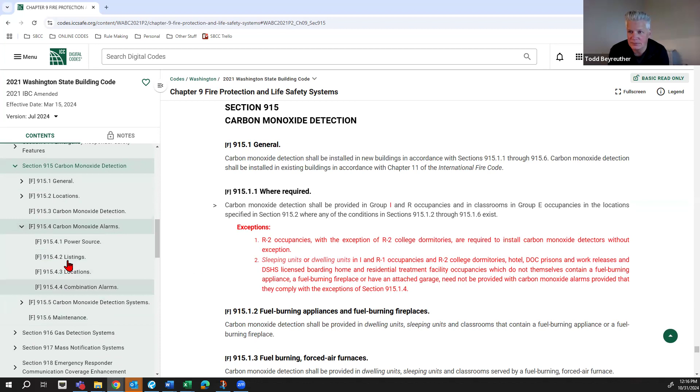Yeah, because Ken, the WAC reference, you said 50 or less, right? So that, yeah, would it be, says, yeah, E occupancies with an occupant load of 50 or less. So it'd be 915.2.3, which... Sorry, guys, yeah, so there you go. That exception that is showing. You move it around, it messes it all up. Sorry. 915.2.3 to compare to this one.

So the first thing is if I have an E occupancy of 50 or more, then alarm notification shall be provided at an on-site location. And then if I have an E occupancy having, an occupant load of more than 50, an audible and visible alarm shall be provided in an on-site location staffed by school personnel.

Isn't it saying the same thing twice? No, well, they're slightly different. One is 50 or more, and the other one is more than 50. So one you trigger at 50, the second one you trigger at 51. I mean, I see what you're saying. So okay. I mean, you can, if you're going to trigger everything at 50, you can, as Michael pointed out, just combine the two sentences now.

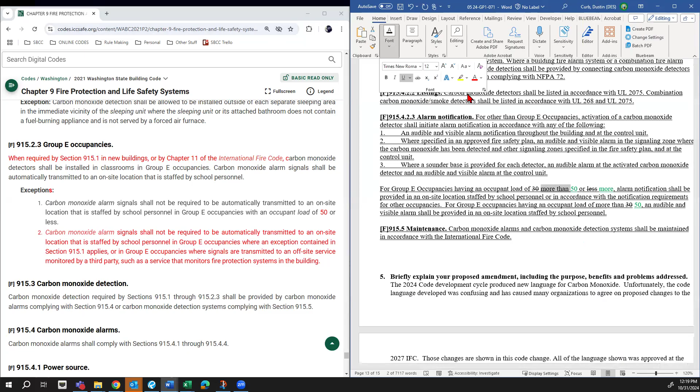Yeah, so if it's 50 or less, they're not supposed to do it per state law. So then 51, so it should be occupant load of 51 or more, right? You can say more than 50 to align it with the second thing. All right. So yeah, Dustin, if you can make that change. And again, John, do you have the history of why we went below national code? No, I don't know that history. Okay.

And then to Michael's point, it shouldn't just be one sentence. Instead of being redundant with the second sentence for group E occupants having an occupant load, just combine it all with an and. So we need to combine in there. I don't know, I think that's what I'm hearing, right, John and Michael? You're saying it should just be an and in there somewhere. Yeah, somehow to construct it, maybe it becomes two separate bullet points or something. But yeah, there you go. Don't need the trigger twice.

Does that align with your intent, Ken? Yeah, I was just trying to figure out where to stick the state amendment with the 50 in the right location, and that looks like that's the right spot.

Yeah, the two sentences seem somewhat redundant, though. Yeah, I think that's what we're trying to clean up here, Carson.

So that's where your cursor is now, Dustin, right? I know you're doing this on the fly and you're doing great, but you'll axe out everything up to past 50 there. That's a bullet point.

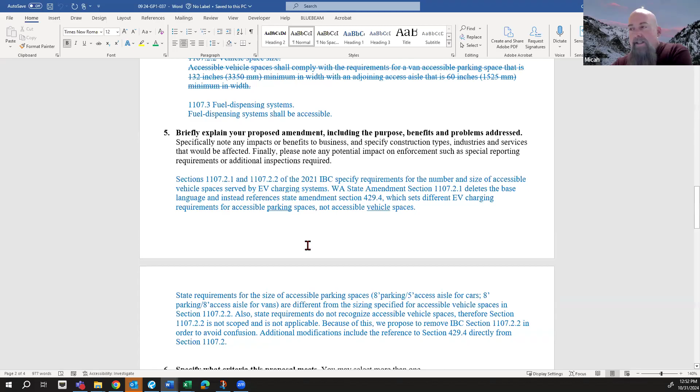So this cleans it up. This sends the EV infrastructure for accessible vehicle spaces back to 429.4 where it's appropriate, and keeps the other electric vehicle charging station information in 1107.2. So it's really just a cleanup of what we have in the state code, because we have modifications in 429 for EV and accessible EV spaces. Just some cleanup here. Hopefully you all support it, and if you need more information, let us know. I shouldn't say hopefully, I'm anticipating you all support this.

Go ahead, Tim. Yeah, I was just going to add on to what Micah said, because I am in support of this. But it does appear like some of the rewording caused us to have to stipulate that we comply with what the state RCW is, which we've meticulously gone over to make sure is all in section 429. I don't want to do that again and also put it in chapter 11. So that makes a lot of sense to me that we just reference it, and there's at least a pointer in chapter 11 if somebody went there first. But at the same time, we don't have to regurgitate everything we have there.

So in short, does this really clean up the discussion we had a month or two ago when we were going back and forth in circles between chapter 11 and 4? But that's the intent here, right? The way I read it. Yeah, okay, yeah.

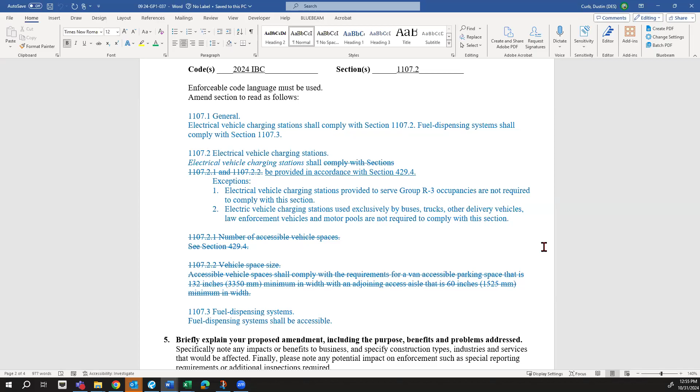Okay, if not, then all those in favor signify by saying aye. Aye, aye, aye, aye. And any opposed? Okay, and this is 037, has been recommended for approval by the full council. Thank you.

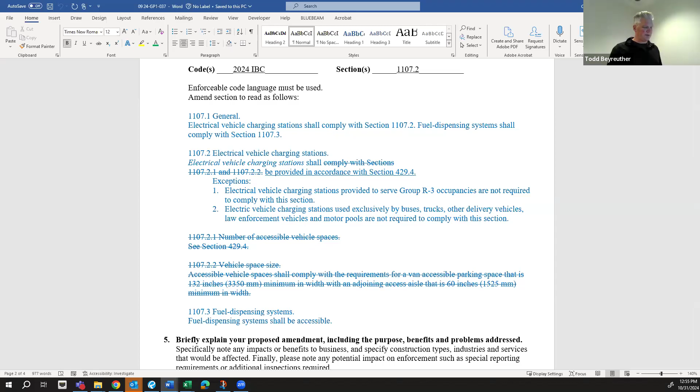Okay, agenda item 10 is another WABO petition, 061. Do we have a volunteer? Jennifer still on? Sorry, who, Dustin? Jennifer Gilliland, or did I bring up the wrong one? No, we have her as the designated contact. Yeah, 11:06, this is correct.

So this one also has Micah and Angela and John's names on it. Go ahead, Micah.

Thanks. I think Jennifer may have dropped off for another meeting or lunch or something. We're pretty stacked today, so would you prefer to wait or? Nah, we can handle this one.

I think this one's going to be another clarification and simplification of what's going on. If you read the reason statement, it clarifies the number of required accessible parking spaces for residents and how those are to be calculated. Hopefully it's pretty straightforward. I know that Jennifer and Rich put this together, and for folks that aren't aware, Jennifer and Rich Williams are both on the A117.

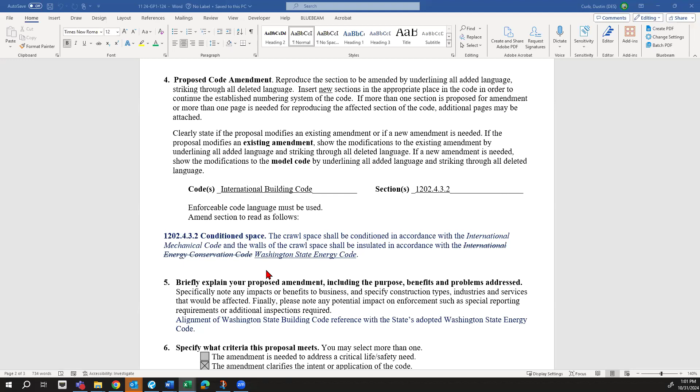Let me see. I think this - apologies, this one fell off my radar. I think it was just moving it into conformance with the Washington State Code. So it's like taking out the International Energy Conservation Code and replacing it with the Washington State Energy Code, just for clarity.

Yeah, it does seem pretty straightforward. Do others remember this conversation? I think we were talking about this at our existing amendments report, or the significant changes, and so this came up to clarify which energy code people should be looking at in this section. Did we ever determine how many times this occurs in the code? I don't think we necessarily did a full accounting on that, no.

And go ahead, John. Sorry, I think you're raising the question I kind of have, are we going to do this throughout the whole code? I think you can handle this much more simply with something in chapter 1 that says wherever you're talking about the IECC, you mean the Washington State Energy Code. Otherwise you're going to have to go through all the codes and find every place this happens and make that change. And it's a maintenance issue later too. Is it, my question, John, on the technical side, if there's a determination by the council that they wanted to do this, is it just a blanket editorial change across the entire code? Or is there the fundamental discussion you just raised there?

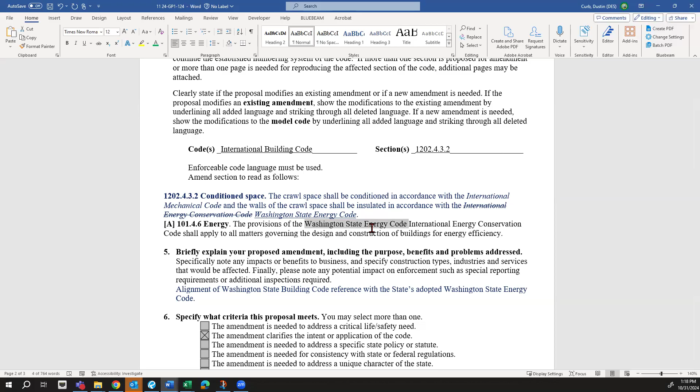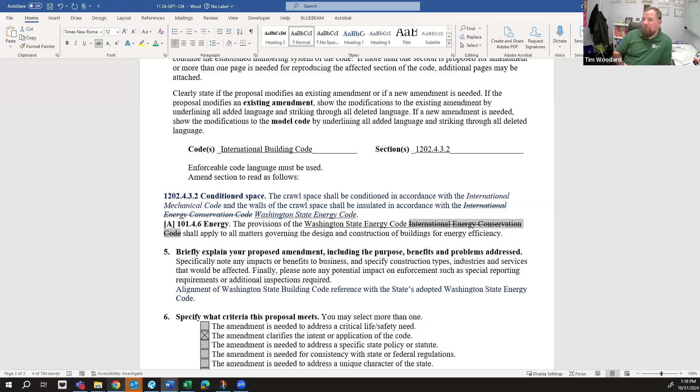51-50-007. Yeah, and that does show up in the preface to everything. Yeah, as the scope and administration of this code. So it's kind of like the user notes to what John was referencing. And it's not the user notes because they got those separate, but it would be at the very preface of the entire code book.

I'm not 100% sure that's the best spot, but that's the spot I was thinking of. It'd be a one-size-fits-all that we can reference all of the model codes and what we refer to them as throughout the building code. So not just the energy code, but also the Washington State Fire Code and the Washington Uniform Plumbing Code, all of the reference codes.

I agree, I think the WAC 51-50-007 is the best place for it. And then of course correlation, each WAC would have to have that same language. So that's why I suggested as a placeholder we could use 101.4.6, but with the goal of correlation essentially being to adjust the WAC 51-50-007 and its counterparts.

Sorry Mike, I didn't see your hand. You're okay. I guess I'll throw this out there as a more broad discussion, and I know WABO has discussed this before. Is there an appetite that we need to bring up at the SBCC to modify RCW 19.27.031 to make an exhaustive list of what the state adopts?

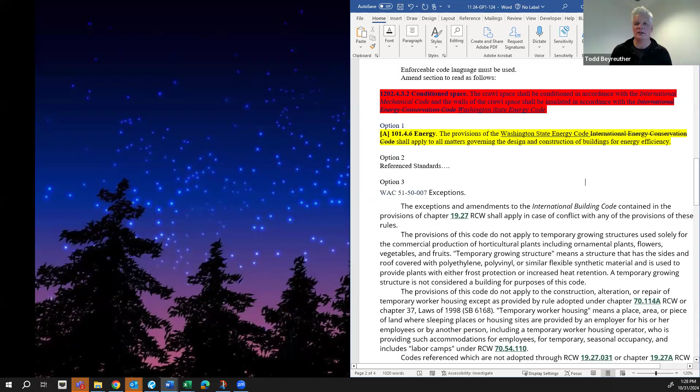It is interesting, I understand Micah and Tim's point there. I also don't think Brett is necessarily wrong. I've always thought it's interesting because the energy code is the one where we technically don't adopt the model code, right? We just basically started over. So I think the intent to clean that up is there, but I also understand how it's confusing or hard.

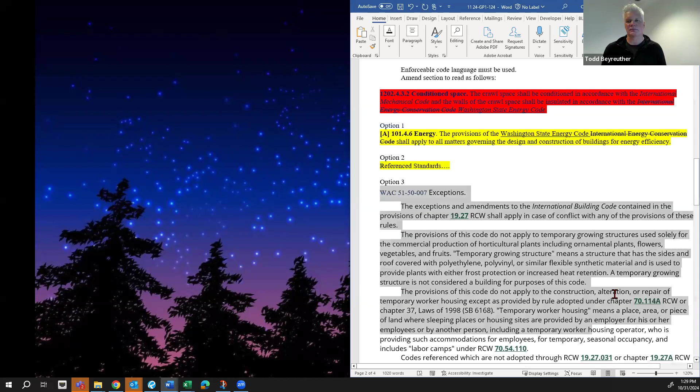Go ahead, Micah. My point is, it's just not technically wrong to do that, just hard, so we don't do it. Yeah, you're correct, it kind of starts with the Washington Energy Code.

However, I think technically the RCW starts with the 2006 International Energy Conservation Code and builds a Washington code from that. So I agree with you for the most part, but if we're going to be 100% accurate... Oh, I know, I appreciate that because I always was curious, and I didn't remember that part. So thank you, yeah, it's a fun part of the RCW.

Again, I think we could do this somehow. I don't know if this is the best path because it's not real clear. Hopefully we can find some clear guidance, but I appreciate y'all moving something forward for further discussion. Thanks. Yeah.

Okay, Tim and everyone, do we have enough in front of us then? Yeah, it's option 2 and well understood enough that we're allowed, we let the staff fill that in. Well, it's my understanding the motion is to take what we have here, and I can try to expand a little bit on this, but to take this to a correlation committee or group and bring it back with some better input.

Maybe more discussion on the wordsmithing within here, and then hopefully have just 3 options we come back with, and then we can move it on up after we get a nice wordsmith version back from correlation. Okay, can we then just briefly restate the motion with what we're looking at? So this is Tim again, and I'd make the motion that we move options 1, 2, and 3 further to the correlation committee to determine the best place to insert a standard that allows us to continue to not change all the wording within the code, but instead find a generic place to reference the Washington State custom codes.

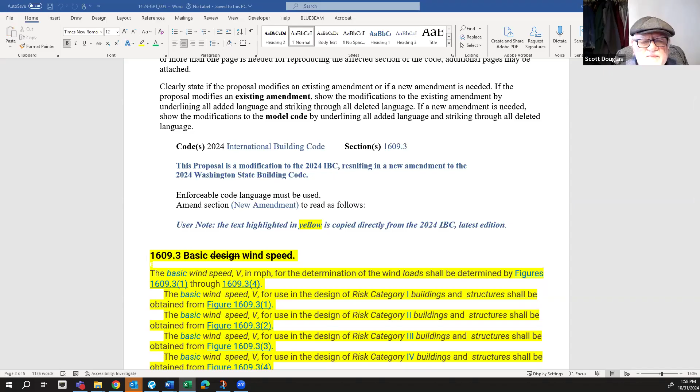Right, okay, great. For IBC 1609.3, the second from the last paragraph, it now states that the basic wind speed for special wind regions indicated near mountainous terrain, gorges, etc., shall be in accordance with local jurisdiction requirements, and gives some guidance in ASCE 7, Chapter 26, to determine those requirements.

So what the Wind Engineering Committee is proposing is changing that language, striking out the local jurisdiction determining the special wind speeds, and referring to the study instead. So in Washington State, it'll be shown as determined in the figure on the next page and also the table. Let's go to the next page.

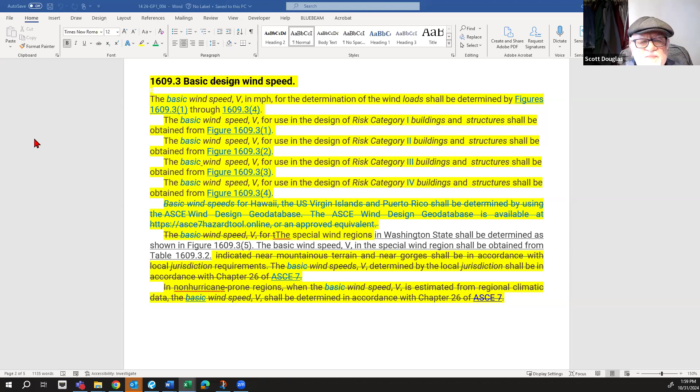Can you get the whole page on the screen? Nope, that's the third page, go back to the second page. Okay, with the map. If you can get— okay, that's good enough. That's good right there, because I can talk to both pages.

This page on the left is on our study, which was approved by our Washington SEAW State Board, and it's now a white paper on our website. The special wind regions up north by the Strait of Juan de Fuca used to extend all the way to the edge of Jefferson County and Port Townsend. With the wind study, they've been reduced to basically 15 miles off the Pacific coast, and a little bit farther inland in Clallam County.

And then along the Columbia River, there were 3 counties that were eliminated as needing to be a special wind region. The wind speeds in the counties used to, for risk category 2, vary from 150 at Neah Bay down to 130. And as you can see on the right, for risk category 2, the wind speeds under the study are now 120. So in general, they're less.

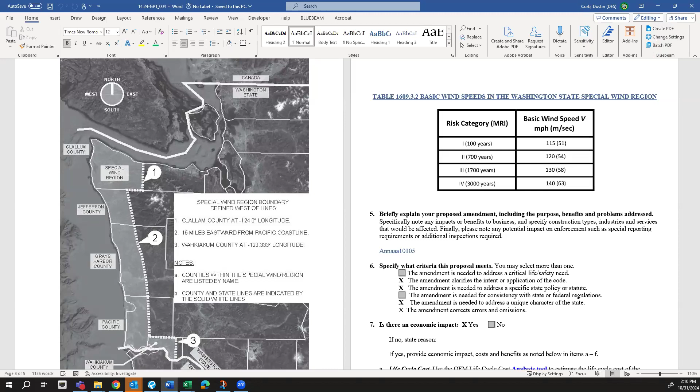I have a question for Scott, and I'll apologize for not raising this earlier because I did work with Scott a little bit on the language and things. I'm looking at those lines running east-west at Clallam and Wahkiakum counties, and wondering if it's understood that those are following the county lines, or if we need to define that a little more closely. We've got the north-south boundaries, sorry, the eastern boundary kind of defined, but we didn't define those two lines in there. I'll apologize for not looking at that sooner, but I just saw that now.

I don't know if other people would understand that it just follows the county line. Yeah, that's a good point. I know the wind maps before used to follow state lines for some reason. I wonder if it was just assumed people knew that was a state line or not. Myself, I would look, oh, that's fine, the county line, but I could label it if the committee thought that was appropriate. I'll leave it up to the tag to decide if they want that clarification. I'm just pointing it out.

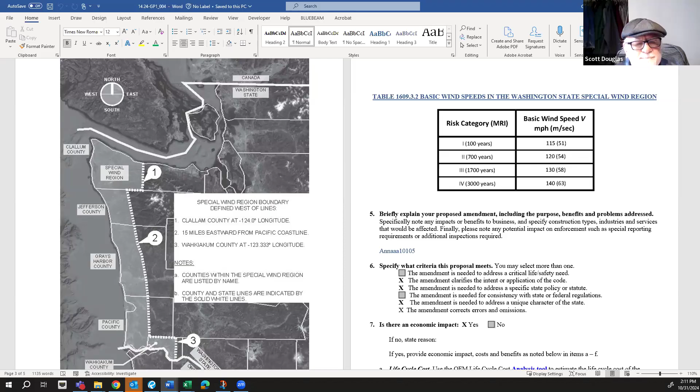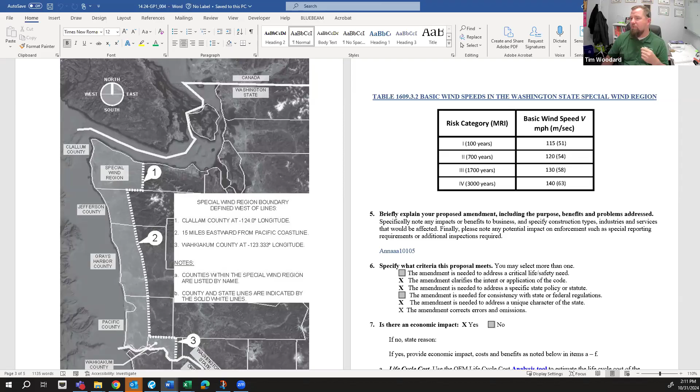So no questions about the technical merits or anything else here. I was just looking at why we struck the word 'design' out of 1609.3 in the title. Was there intention behind that? Because I think it was renamed Basic Design Wind Speed a lot of cycles ago. As far as I know, it's maintained that name through all the different codes.

That was a request by Don Scott. He used to be the chair of the ASCE 7-28 Wind Engineering Committee. I think in ASCE 7-28 the word design is stricken and not used - they just go to basic wind speed. I'll double check, but I'd give you 10 to 1 odds that that's the definition in ASCE 7-22 and 7-28. So we're just replicating that. Somehow the word design got in there and should not have been.

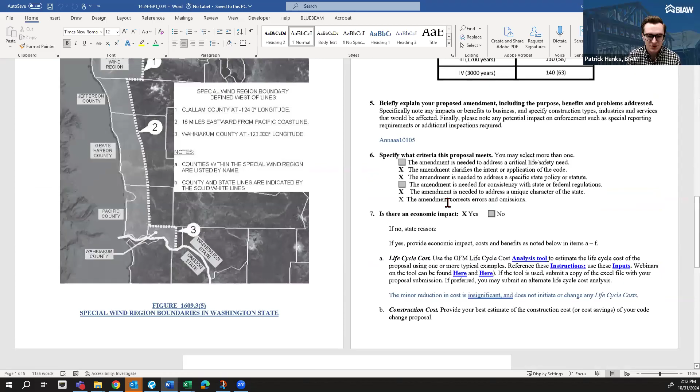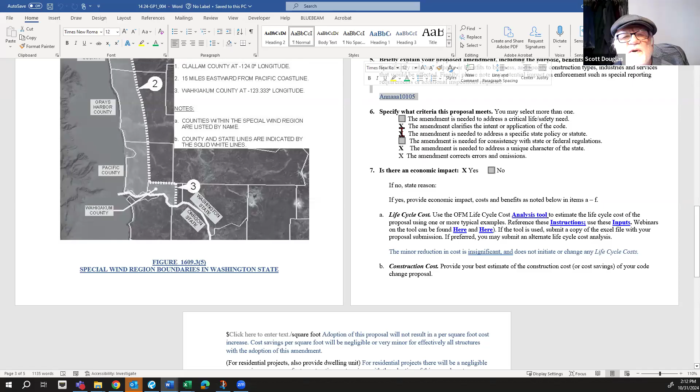No issues with the technical merits of it or anything. I just want to point out that under the law, proposals, the form needs to be complete in order to be valid and adopted by the council. And it just looks like item 5 isn't quite filled out correctly. I'm not sure what's entered there is supposed to mean. I think it's clear that there's merit to this proposal and the proponent has provided a great explanation. So I think if you just submitted a revision that provided a little bit of information there with what's been talked about today, that would make it complete.

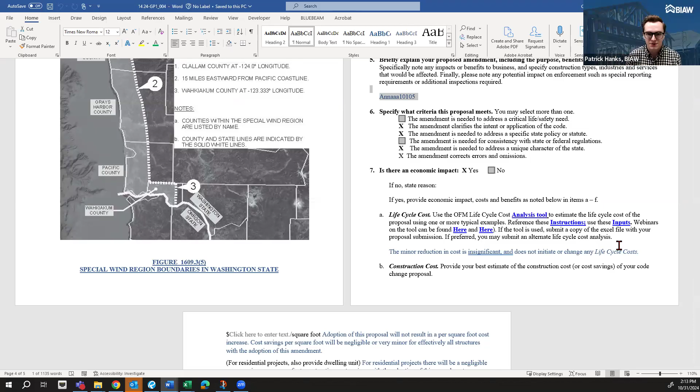Thank you, I didn't even notice that. Let me see: 'Briefly explain your proposed amendment, including the purpose, benefits, and problems addressed.' Gee, I don't know how that happened. Okay, so what do I need to do? This is my first proposal - I thought I put in the right verbiage that I thought I sent.

So, if you wanted to just provide some verbiage for that, we can insert it in there. If you wanted to provide a whole new document, either way works. If we're just trying to expand upon that reason statement, I don't see any reason why we couldn't move this forward with the notion that what was discussed here will kind of be included in that reason statement for inclusion to the council.

And then we just catch it while we're doing final approval of the tag. Okay, thank you, though, Patrick.

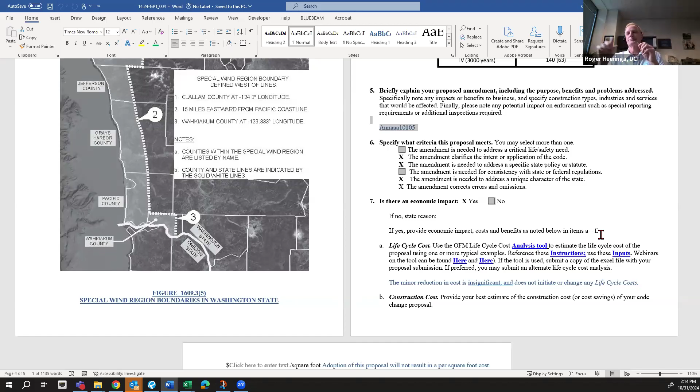Roger? Yes, I've got a few things. First, I wanted to commend Scott. He was the very first person that reached out to me about when we can start submitting proposals for change, so it's been a long time he's been working on getting this through. I fully support the proposal. I do think adding a note C to say that the horizontal east-west lines align with the county lines, if we're going to do it, let's make sure it's as clear as possible.

And then the other one, I guess, and this is maybe for Dustin, but there's a word that's escaping me. How big is the file? How much detail, if we're adding a map, what is the file? Is it just an image, and how detailed, how many pixels are in that image, that kind of thing we need? So just an administrative question on how we're going to implement putting a map in.

I think for rough drafting, what I have here on this proposal will work, but I'll need to reach out to ICC. I thought I saw Brian, am I on here? He's on our call today, he's the new representative with ICC. Brian, would you have any input on what kind of file type we would need for our publishing? I don't know, but I can follow up with you afterwards. Okay, awesome. I'll plan on shooting out an email to memorialize it and see what we need for file types. Thanks.

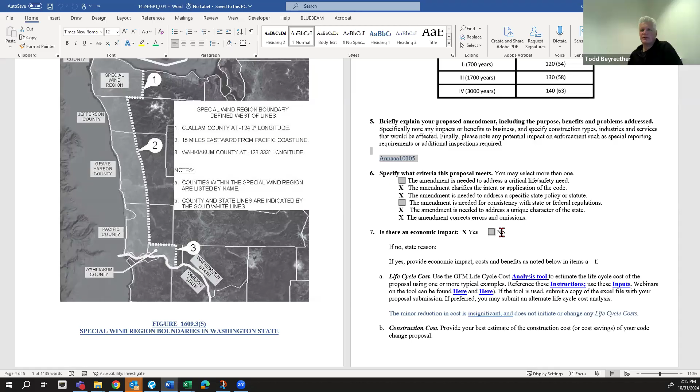Okay, thank you, Roger. John? Okay, sorry, just looked up for Tim's benefit, the defined term in the IBC is basic wind speed, not design. So that's a defined term.

As far as the figure goes, I don't think we need to worry about mapping. The issue is we describe it verbally in items 1, 2, and 3, so we know where the things are. I don't think you need a map that people can blow up and look at. It'd be like the seismic maps, they have contours there, but on the West Coast none of those are really usable, you've got to go to the tool. Same thing here, we've got it defined. I would suspect that something very similar to this figure should be adequate enough, again because we've described it verbally. So that's my opinion, it's just a figure, it's not a map.

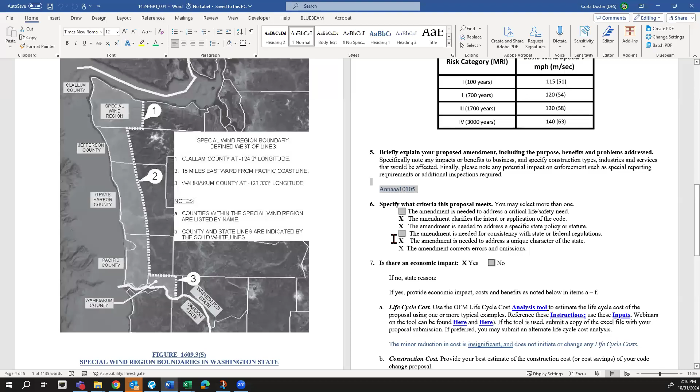Good job. Josh? Well, a lot of what I was going to say was already covered, but I'll echo some others. First, I definitely agree with adding a note C about moving these boundaries along the county lines for clarity. I want to say thank you to Patrick. I had written down that I wanted to briefly explain the proposal, but I mistakenly wrote it down on the next one, so thank you for catching that.

And then last but not least, John already beat me to it, but yes, the defined term is basic wind speed, not basic design wind speed. So I'll stop here, but thanks everyone for getting all these items first for me. Okay, thank you, Patrick.

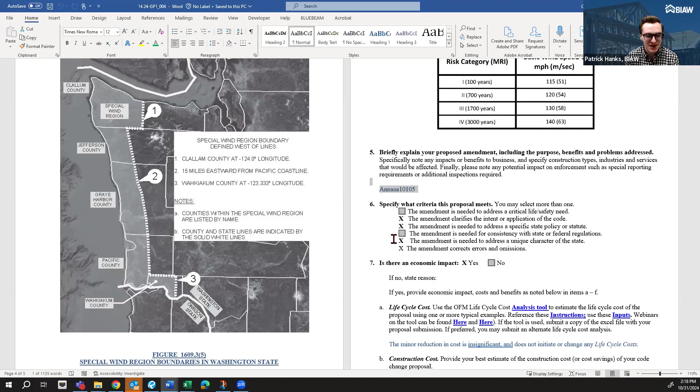Yeah, I was just gonna add a note for Dustin. You might want to also check with the Washington State Register, because the code proposal changes get posted in the Register and then in the WAC, and I don't know how the image file types work with that. So you might just check with them to make sure it's all gonna work out okay with what they need. Thank you, I think that's an excellent catch there, Patrick.

So thank you. I was going to say, first of all, thank you Scott. I learned a lot today, and I appreciate that there's sophistication to the modeling, yet we can still communicate in a very simple way on the map, a paper map, as you called it. So with this figure, my question is, as a hazard figure map, is it appropriate to do by reference and park it somewhere, like we do with the other tsunami and wildfire maps with DNR? Or is that going too far?

I should... John, really? Yeah. Go ahead, Scott. Yeah.

Well, if you think that's more appropriate, sure, but this more or less follows. I think the tsunami maps and wildfire maps are not part of Chapter 16. In Washington State, the tsunami is part of 16. Yeah, but they're separate maps in a separate section.

John, you helped craft all those. Maybe you can shut me down if that's wrong. I have an opinion on this. Well, mine was an opinion too. My opinion would be that you don't need that level of detail. The tsunami maps have to be very detailed, so you do have to point to somewhere else where people can zoom in and get those inundation areas. So I could see those being separate.

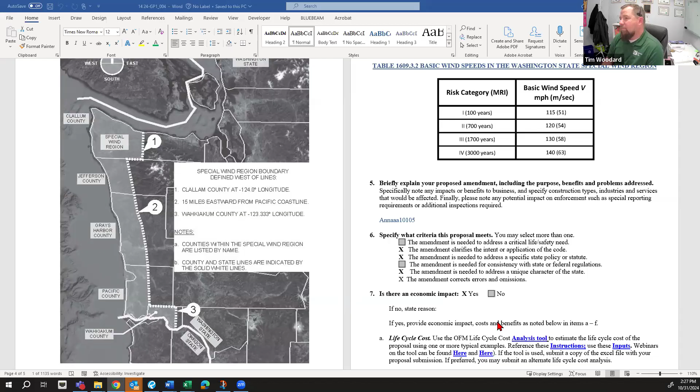Okay, so that's the motion.

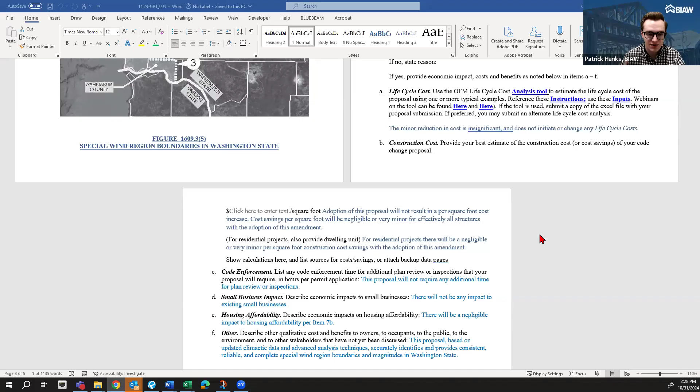Patrick, you want to sneak in a comment here before we hear a second? Yeah, just on the economic part, I actually think that this is filled out correctly, and I appreciate how the proponent did it. This is how I would prefer to see other proposals do it, when there's a very small or negligible impact, that they check it yes, and then just identify that it's negligible and hard to quantify. I think that makes it very clear as to what it's doing. Okay, good comment, Patrick. Thank you.

Okay, so Tim has put a motion down to recommend for approval by the full council, with the caveat that we're going to check the proposal form for completeness before final passage. This is Josh. Okay. Thank you, Josh. Okay, any other discussion on the motion?

Okay, with that, all in favor signify by saying aye. Aye. Aye. Aye. Aye. Any opposed?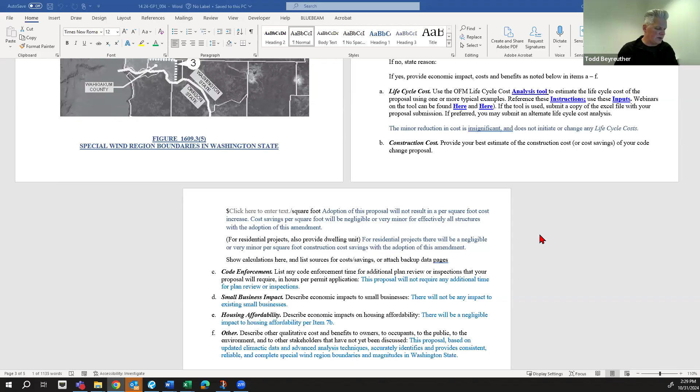Okay, thank you. Quick question just for my notes.

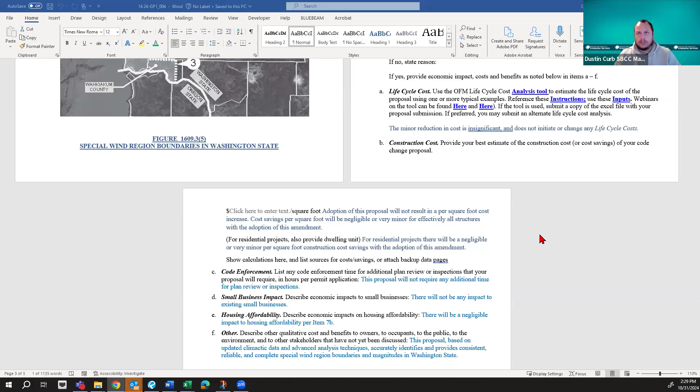The revisions we're expecting in the proposal form, that's all well and good. Are we expecting revisions to note C or to the notes in the graphic here at all, or are we okay with the graphic as depicted? I got some notes here that I was going to send to Scott, looking for an expansion on number 5 and to modify the county horizontal lines, but it sounds like we maybe got away from that. I just want to clarify what I'm going to send Scott.

I didn't include any of those changes in the motion. Okay, then I will not ask Scott to give me an amended graphic. We'll go with the graphic as is.

I think after discussion it makes sense to. I think it was worthwhile discussion, but as somebody who was saying let's change the map, I have come full circle through discussion.

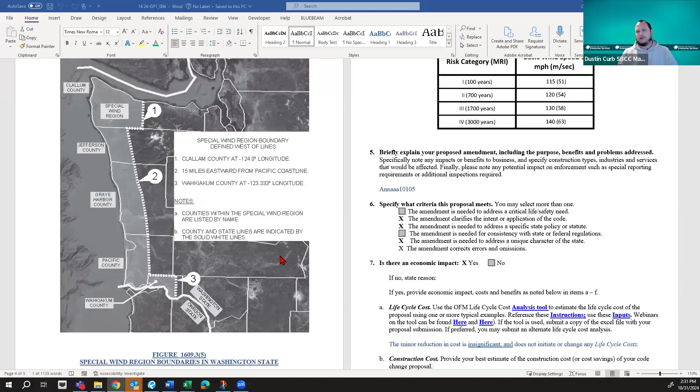Good discussion, thank you Scott. I'll get something from you, Dustin, on exactly item 5, the reason statement, and probably the map's okay as is. And if not, you'll let me know, right? Yeah, I'll reach out to you today after the meeting, and you'll get an email specifying exactly what we're looking for. Okay, that's great. Thank you. Thanks, Scott.

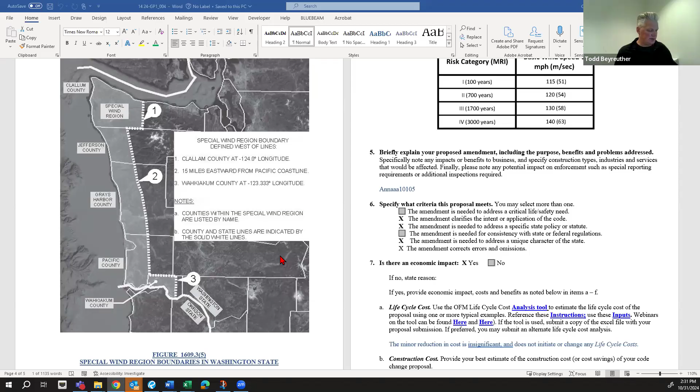Okay, we have 30 minutes left. Let's keep moving. Agenda item 15 is petition 043. There's another engineering one, let me get it popped open.

This is from the Structural Engineers Association of Washington on the Earthquake Engineering Committee, and we have Scott Newman as the designated contact. Are you online, Scott? I'm not seeing him online, and I don't think we have any other folks. We have Julius with his hand up.

Okay, go ahead Julius. I corresponded with Scott Newman on this proposal. I'm Julius Carrion, structural engineer with City of Bellevue, and I also chair the structural subcommittee, WABO TCD. This proposal that Scott wrote is to undo the existing state amendment for the multi-period response spectra section of Chapter 16, because when we adopt the 2024 IBC, which references ASCE 7-22, that whole section of multi-period response spectra is already included in ASCE 7-22. So the existing state amendment is not needed anymore. That's basically what this proposal is.